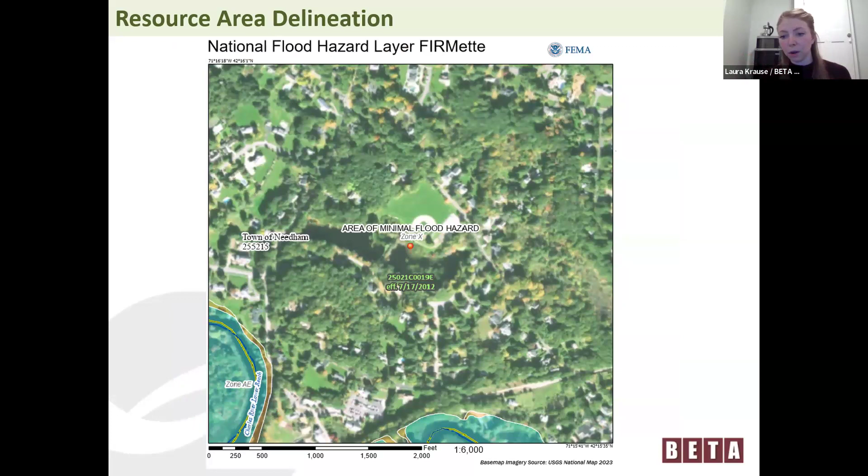And then on the north side towards the Walker Gordon Field, we do have some bordering vegetated wetland off of the bank there. So that was delineated in a couple of locations where there may have needed to be some physical work, but we actually don't have any wetland impacts, which I will get into. Also just want to point out that there is no floodplain mapped by FEMA on the site. So our resource areas that we're dealing with are BVW, land under water, and bank. And again, this is another image of a different time where you can still see extensive vegetative growth within the pond.

So a little bit about the outfall relocation. To get the project going in this location, we'll place the erosion controls at the limit of the outlet control, the existing structure. Regrade, pull back the structure, place a new head wall. Sorry, where's my cursor? New head wall in this location, and then we'll have this sediment trap and dissipator pad at the discharge point. That'll provide some additional attenuation of the flow that's coming from Walker Lane, and it will prevent additional scour at the bank. So this is a benefit to prevent some additional scour at the bank there.

This work will result in 10 linear feet of bank impact, and that's only temporary to provide enough room for the contractor to work there, grade out appropriately, and install their erosion controls. Once the project's done, they'll stabilize the area, native seed, and then remove the erosion controls once sufficient stabilization is achieved.

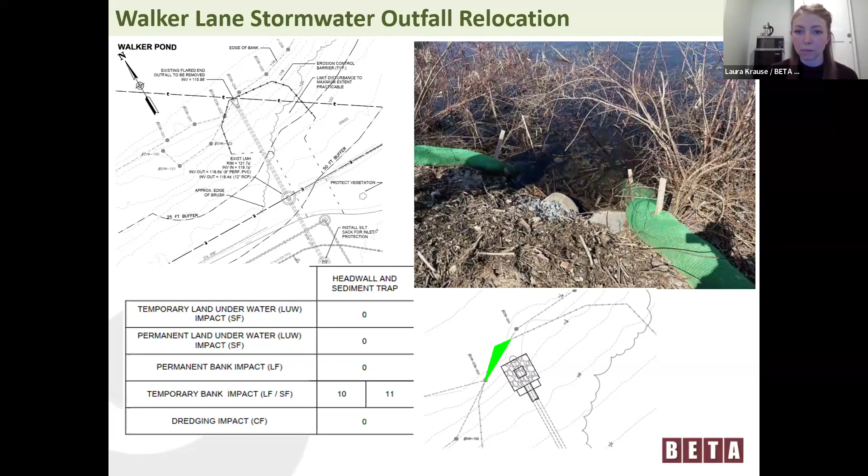The outlet control structure, this is a little bit more complicated here. This photo on the upper left is the existing outlet control structure. It's not in great shape right now, and that's why we're replacing it. You can see a board right here, and that's currently what's serving to regulate the water level right now. The proposed outlet control structure will be located essentially in the same location, and to construct it we'll also be providing a new drainage manhole in Central Ave here. And that will allow us, if we need to during construction, to bypass into the pipe beyond the limit of work. And it'll also provide this section of the outlet control structure as its own piece of the system, which will provide better maintenance over the long term.

You can see in the lower right-hand side here, those are our impact takeoffs. The new outlet control structure, because it's intended to handle the water here and is supposed to be in the same location, it's actually slightly into the pond. That's the only configuration that works for this particular structure. So it will result in 14 permanent square feet of land under water impacts and 11 linear feet of permanent bank impacts where the new structure will go.

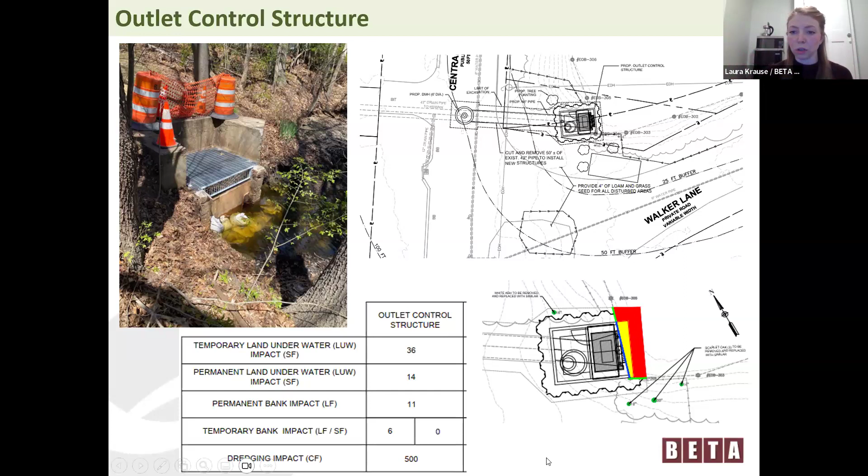And then outside of that, temporary impacts will result from installation of sheeting that will be placed around where the outlet control structure will be placed. That sheeting will also serve as the water control structure. They'll pump the water from there so that the work area can be dry, and then they'll install the new structure. At the end, they'll remove the temporary water control structure and restore the land underwater and bank in those locations.

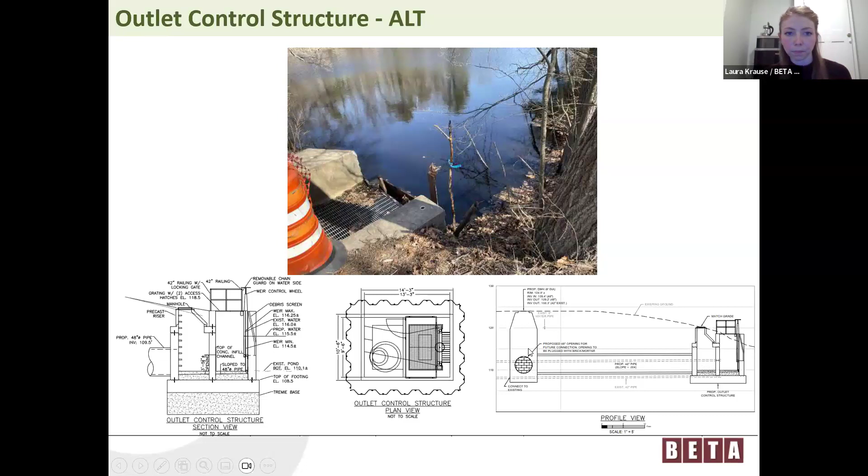It's another view of the outlet control structure looking into the pond, and a couple of additional views of the system here. So this is a profile. So this is the outlet control structure on the right side. Water will flow in. There's an access manhole on the back side of the outlet control structure, the new pipe, and into the new manhole. This is another picture of the impacts, but we've already discussed that.

So I will move on to another exciting portion of the project. So this was not part of the project as discussed back in December. So this is a little bit new. So these improvements, there's kind of three things happening here. The first is that we'll be collecting and treating stormwater from Charles River Street in a subsurface infiltration system under the existing parking lot. So this will provide some additional treatment from the roadway runoff, where right now it's running off the road through catch basins directly to an outfall. So now we're going to actually get some treatment there.

Also, we're proposing a perimeter trail along the north side of Walker Pond, along the down gradient limit of the fields. This trail is also going to serve as a perimeter infiltration trench, and it will have check dams every 100 feet to ensure that the water in the trench will actually infiltrate and won't just follow along the trail and make its way to a low point. So it'll actually infiltrate within the system there.

This is a really exciting aspect because nutrient loading to the pond from the field will be minimized because water will be treated through the infiltration trench, and then also, if it does end up overflowing, will be treated through the additional vegetation being proposed through the restoration of the buffer zone on the down gradient side of the trench. Those areas will be seeded with a native wildflower mix, and then areas that are currently maintained as lawn that are actually wetlands will be seeded with a wetland seed mix and restored to wetlands.

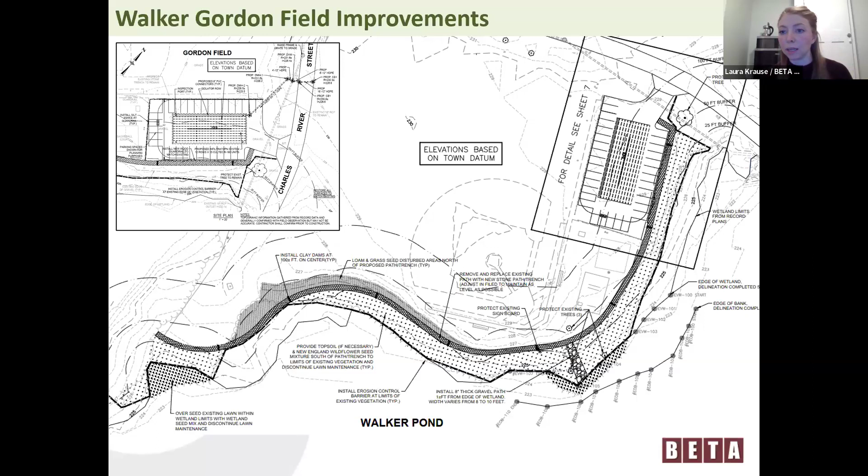So now I'll get into the pond management. I know that this was discussed in December, but right now, the first year, we're really looking to treat the aquatic nuisance vegetation, some hand pulling of invasive species management. We'll replace the outlet control structure this year, and then we'll install EutroSORB filters at the inlets to provide some additional phosphorus mitigation. Year 2, we'll be providing spot treatment with herbicides, and then we're going to be working on designing an aeration system at that point. And then year 3, continue to control weeds if necessary, install the aeration, and evaluate whether or not some additional sediment might need to be managed down the line.

And all of this will be carefully thought through every year with extensive water quality monitoring and vegetation monitoring to ensure that we know what's going on. We don't just want to be using herbicides all the time when it's not necessary. So included in the notice of intent was an alternatives analysis where we looked at several different types of chemical treatments, different ways to treat the pond with physical means, to address the water quality issue. And one thing that we did want to point out, as requested by the commission, was, well, what happens if we just do nothing here, right? What happens if we just let it kind of become a wetland?

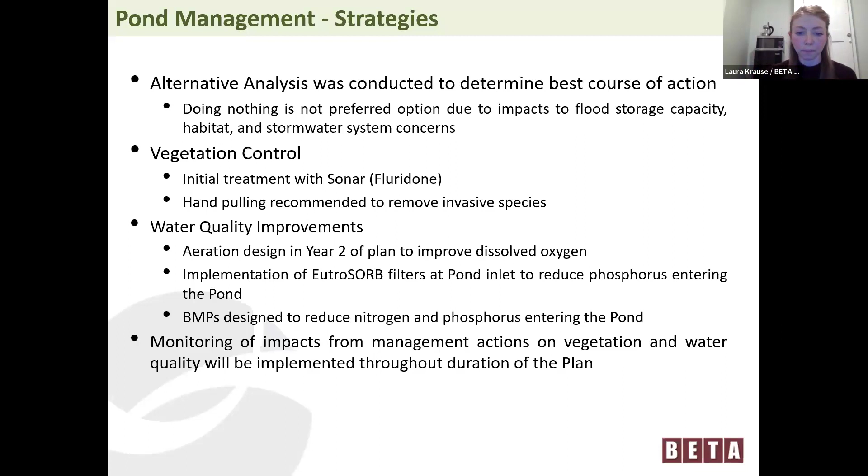And then lastly, there's a couple more things. The EutroSORB filters I already mentioned at the inlets to control phosphorus, and implementing the BMPs at Walker Gordon Field to reduce nitrogen and phosphorus to the pond as well. This was included in our pond management plan as an attachment to the notice of intent, but it's a general distribution of what has been observed out there to date. Extensive, as you can tell, vegetation throughout the pond.

And then from a mitigation and avoidance standpoint, the outlet control structure work, as I discussed, will be conducted behind sheeting, cofferdams. That will minimize turbidity increases in the water, which is something we want to prevent. We'll restore temporary land underwater and bank impacts with regrading and seeding on the banks, and then reestablishing a native substrate in the land underwater before we raise the water back up to its intended level. Portions of the buffer zone at Walker Gordon Field, as I discussed, will be restored with native seed mixes.

There are 4 trees being removed, 3 scarlet oaks and 1 white ash at the outlet control structure. And those can be replaced. We take the commission's suggestion on what species they'd like to see. And then invasive species removal, which I had already mentioned. So really exciting project. The next steps here are preparing the 404 pre-construction notification submission to Army Corps. That submission is required solely for the outlet control structure.

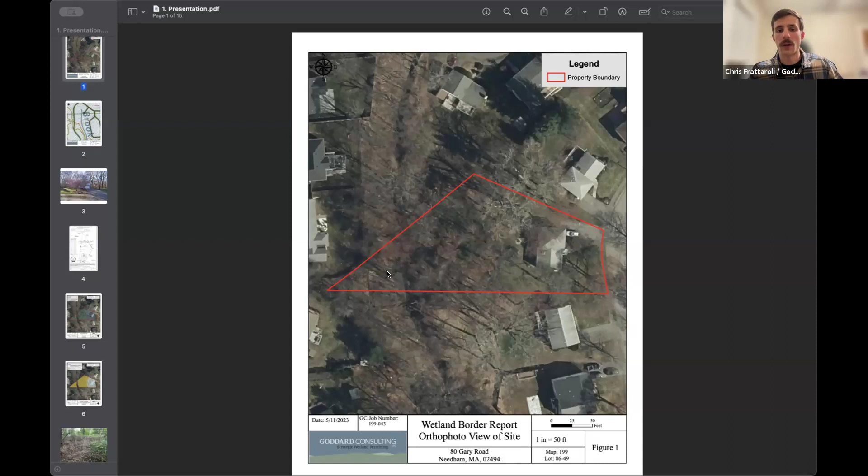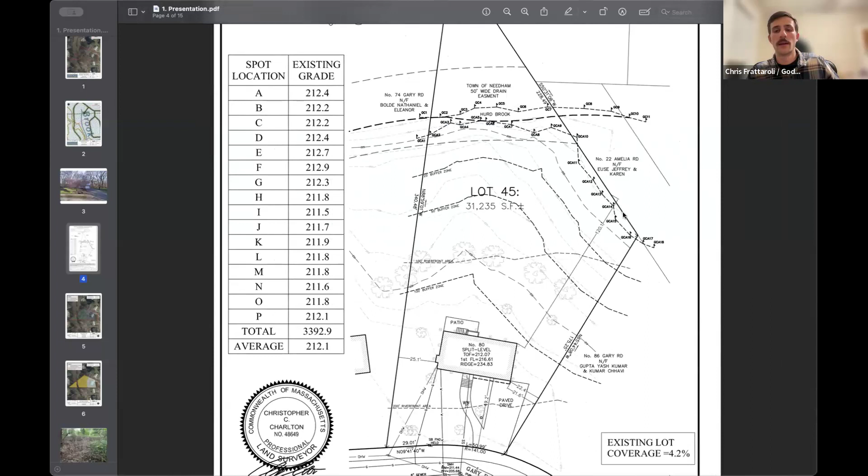The GC 1 through 11 series is going to be the mean annual high water line of that stream back there. And then the A series that extends in front of it is the bordering vegetated wetland line. So that is relatively narrow along this section of the stream, and then it kind of opens up over here. As far as the riverfront area on the site, you can see this green hatched area is that inner riparian zone, 0 to 100 feet. We have about 15,612 square feet in that inner riparian zone.

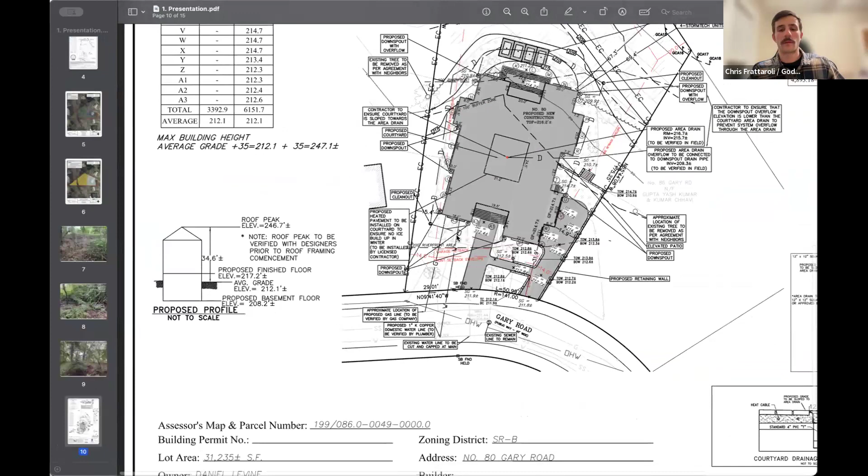Moving down to our proposed plot plan. Obviously, the house here is shaded in gray, walkway and driveway at the frontage. We'll see this smaller hatching in here, really tight around the house. This is our proposed lawn area. It's really just enough to be able to access around the house. We're trying to maximize the amount of habitat space that we're able to provide here.

So really the entire rest of the site, including up each property line a bit, is going to be managed for invasive species. This is primarily lawn over here, but this is all going to be converted to native habitat. This is all going to get seeded with a nice native herbaceous mix that's appropriate to the site, and then planted thoroughly with shrubs and trees.

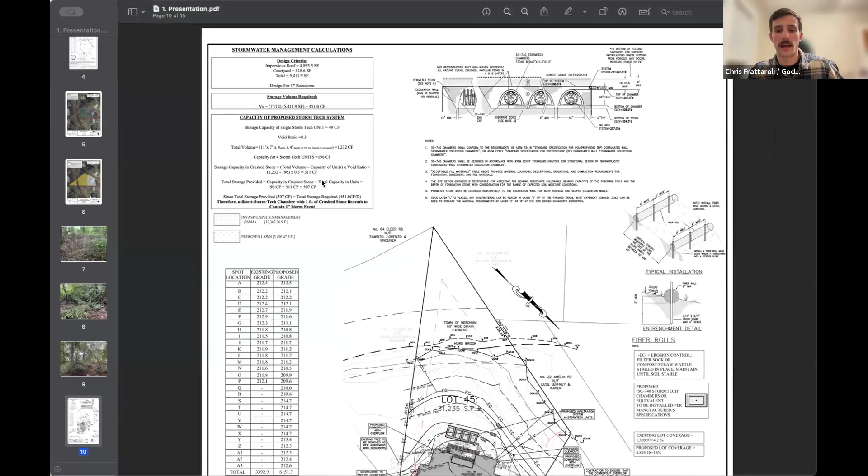You also see we do have a stormwater management system back here. It's 4 StormTech units. The revised plan does provide some calculations as to the capacity of that, and some more details of the system itself.

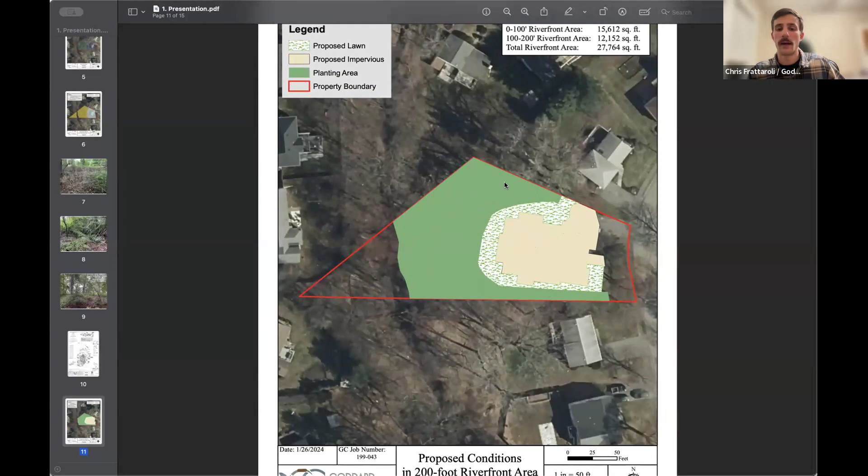Moving on down the line, this is essentially what we're looking at for a finished product, more or less, in really broad strokes. This beige area being the home itself, walkway, driveway, etc. Again, that really narrow lawn around the outside, just what's needed, nothing more. And then the green area is going to be what we are planting. The intent is to create a nice native habitat there with healthy vertical stratification between herbaceous, shrub and canopy layers.

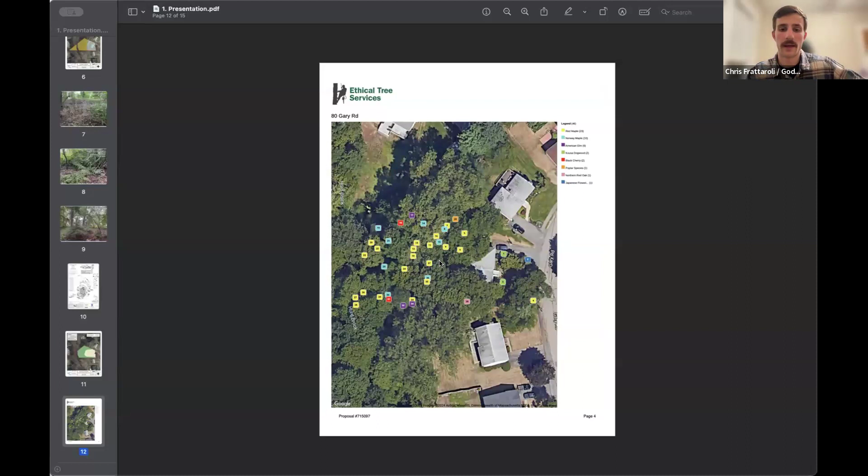As was requested, we did have an arborist go out and inventory the trees out there. So this is a little graphic of what he found. Then I took that graphic and overlaid it on the site plan just to make it a bit more cohesive. So these are essentially all the trees. I think we might have found one today that did not make its way into the inventory, but these are the trees on the site.

Yellow being red maple, that's the primary species here. We also have a decent bit of Norway maple mixed in, a couple of black cherries, a couple of elms, and a few others. So that is what we're looking at. As far as tree removal, we do have a decent bit of grading that needs to be done. So we are proposing to cut a lot of trees. There's no question about that.

We have a planting schedule. So what we've really done is we've beefed up that planting plan a lot. We've provided a substantial increase in the number of trees and shrubs. We're going to move down one more, and you'll see it has filled in nicely. These quantities of proposed plantings do comply with the town's policy on tree replacement. So for every tree that's going to be removed, we went through and did the math, and we're combining the tree and shrub replacements.

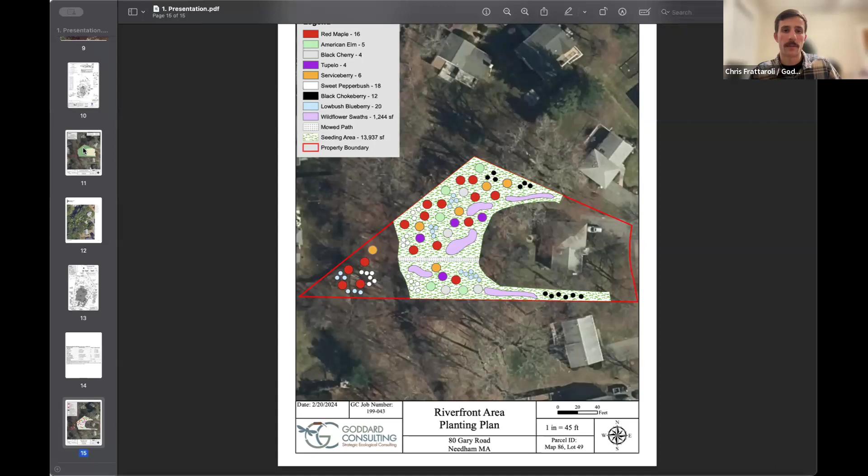Okay, great. Thank you. Let's go to the commissioners with any comments or questions. We'll start with Paulina.

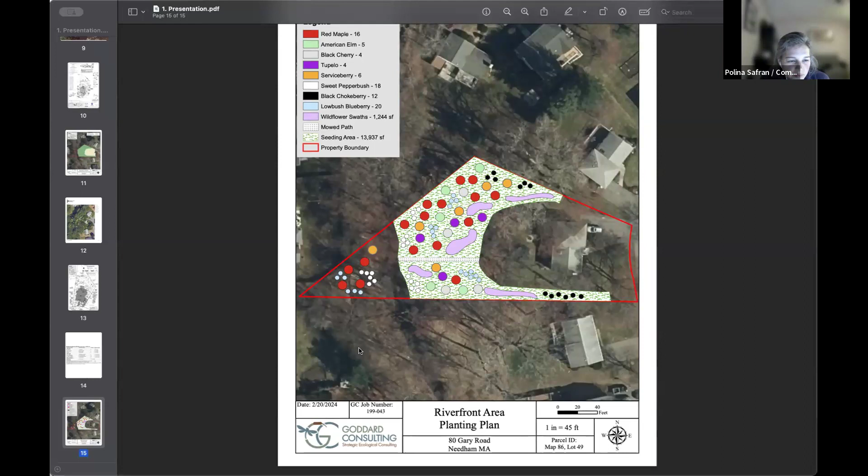Yes, I have a question. You showed us a plan. If you can go back to your page 13. Yep. And so there are a lot of trees that are labeled in the back, like 29, 26. I think they're all red maples. And you said you're not removing those. You're just removing number 21, which is a Norway maple. Is that correct? That within the 25-foot buffer zone, correct.

Yep. That 21 is the only one in the 25-foot buffer that's getting removed. Okay, so everything else is just a tree you identified, but it's not being removed. In that 25-foot buffer zone, yes. Maybe I didn't see the buffer zone. Sorry. Oh, yes, I see it right there.

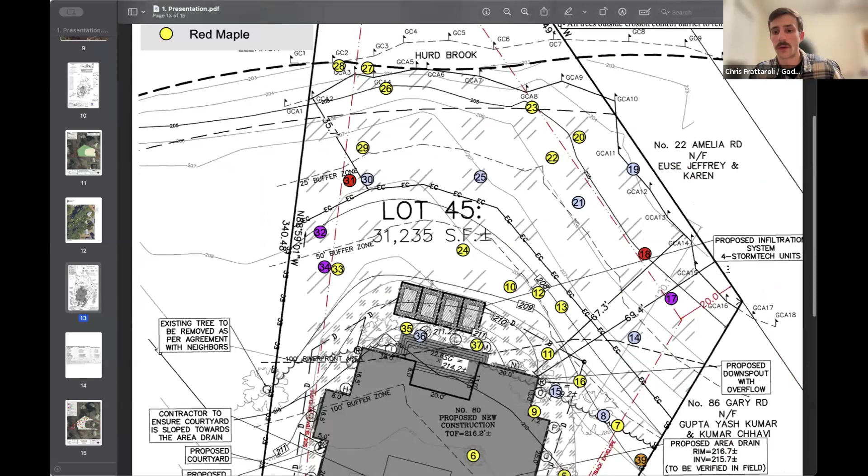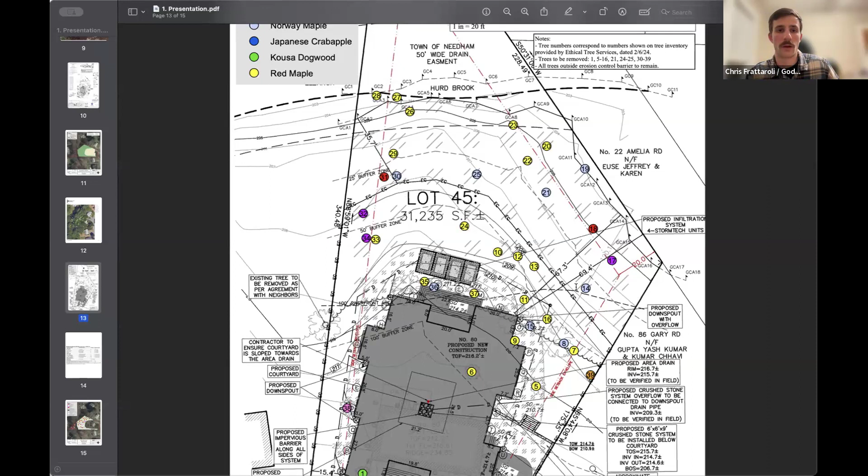Yep, along here. So really everything inside this erosion control line, that's all going to have to get removed for grading purposes, because we do have grade changes through here. And then these, let's see, 4 right along just outside that erosion control line are also proposed for removal. Obviously 3 being Norway maples.

I guess to me, it's why would they be removed if they're not going to be impacted by the grading? Yes, they're not native, but at the same time, it's a tree. I don't think you should just remove it just to remove it. Sure thing.

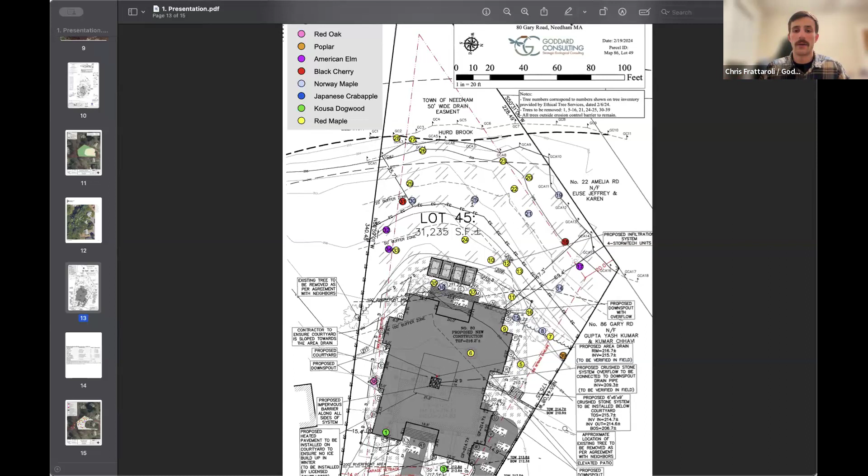Sorry. The idea here is really to kind of open it up and allow for, like I was saying earlier, that vertical stratification. There's really no shrub layer in this area, and the only herbaceous vegetation are some of those really aggressive invasives like the Pachysandra and English ivy. So our goal is really to open it up, allow more sunlight to penetrate, allow those herbaceous and shrub layers to really thrive and reestablish themselves. So that's the idea behind that. Okay, I don't have any other questions.

Okay, Allison? I didn't do the math, but are the trees that are being removed in the buffer zone, in the new planting plan, are there sufficient quantities to meet the requirement? Okay, that's one. And the second thing is, I apologize because I don't remember, is American elm really on our plant list? Clay, can you check?

I don't know if it's on your plant list specifically, but the reason that we included those was because there are a few elms in that area that will need to be removed for grading activities. So we thought it would be a nice nod to kind of replace those in kind. But if we do have concerns about Dutch elm disease, we can certainly revisit those as choices for plantings.

I mean, unless you're going to plant a disease-resistant American elm, which you didn't say you were, I would agree, I don't think it's a good idea. The disease is not gone. It's not as bad as planting an American chestnut, but it's not far off. I love them. They're my favorite tree. But there are some disease-resistant American elm varieties. I would look into that. Don't just get an American elm, you have to get one that's really been tested.

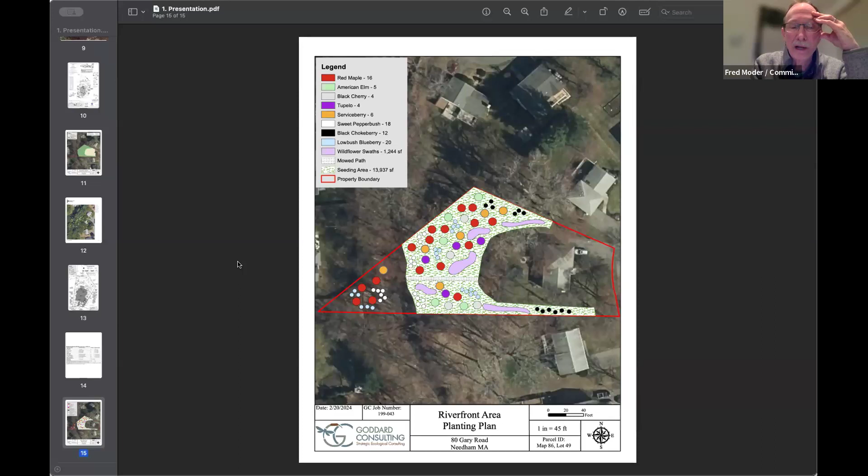That's one. And then the other thing is that when we were out there, we saw that there was a couple of very, very mature grand cottonwoods that I'm not sure are on your inventory, and I'd like to clarify what the plan is about those trees. Yeah, absolutely. So to your first point, I remember this was fresh in my mind because I was working on it recently. The provision is that up to half of the trees to be replaced may be replaced at a 4-to-1 ratio with shrubs. So that's what we've gone ahead and done. We think it's, again, going to provide that nice mix between that canopy and shrub layer.

And then as far as those cottonwoods, this number 39 right here is essentially right on the property line. That one is proposed to be cut. The other one that you saw is well off site over here. And what's the need to cut that? I mean, I don't know if you have a figure on the diameter of that tree or its possible age. I do believe those were included in the tree inventory. Let me see if I can pull it up really quickly.

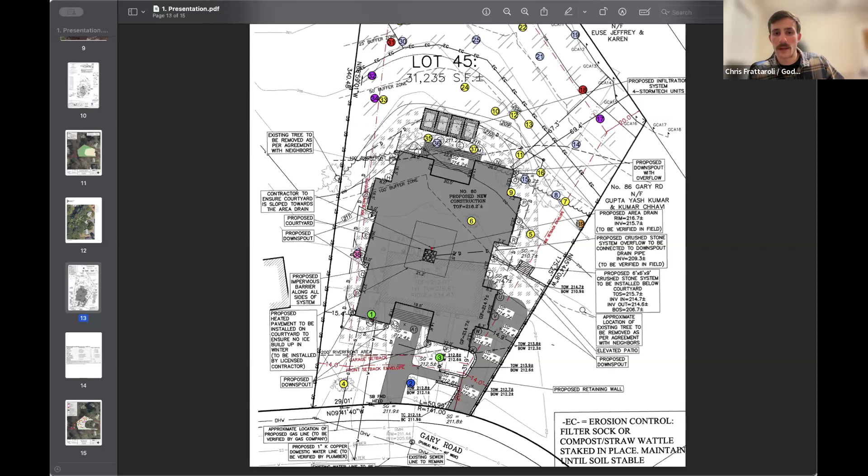That tree was listed as a 37 to 42 inch DBH. So another stipulation of that tree replacement policy is that trees over, I think, 32 inches should be replaced at a 3-to-1 ratio. So that's been included in that as well. I think the major concern is that because of its size, it is going to be overhanging or at least very near to the proposed building here. So that's really the idea with that one. But the second one that you saw is offsite and is more over here, obviously not a part of our plans. So the tree couldn't be pruned instead of removed? It's possible. That's certainly something we can look into.

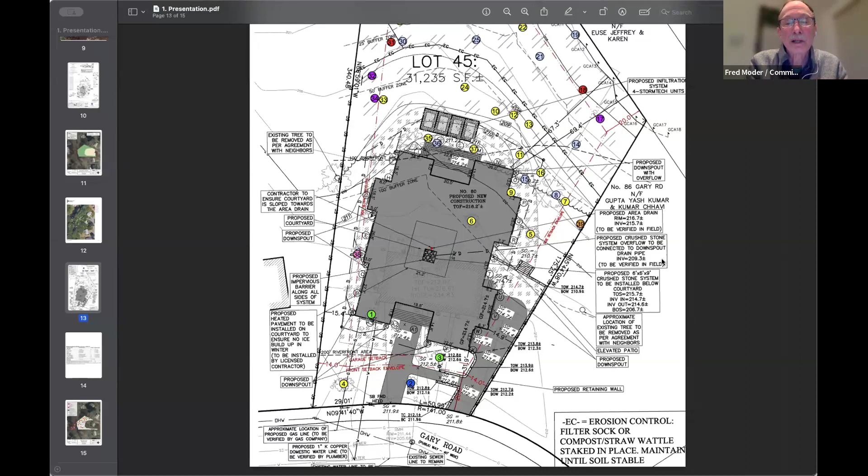It was a visually stunning tree, and from what I know, it has pretty good habitat value. One thing I'm thinking about is that there's really a nice effort to remove invasives and to restore a lot of native trees. However, from a habitat standpoint, I believe it's really nice if you have some mature trees along with some younger ones. You're going to open up a lot of sunlight, but then all these trees are going to grow up and mature. You're going to have shade again. And if you can preserve as many of the mature trees while you're introducing the young ones, it just seems like that's going to have a real benefit to the area.

Sure, that's absolutely something we can explore. Maybe we meet in the middle there and hold on to a few more of the mature trees and kind of scale back in that regard.

Anything else, Fred? Nope. All right, Reed? Yeah. Chris, thanks for meeting us at the site today. That was very helpful. Absolutely.

And yeah, I'd just like to echo Fred's point about the cottonwood. It's a very impressive tree in good health. So I think anything that can be done to save that tree would be appreciated. I appreciate what you're proposing to do also in terms of creating a native habitat back behind the house in that riverfront area. And I think a lot of what you're proposing to do is great with invasive species removal and the native plantings.

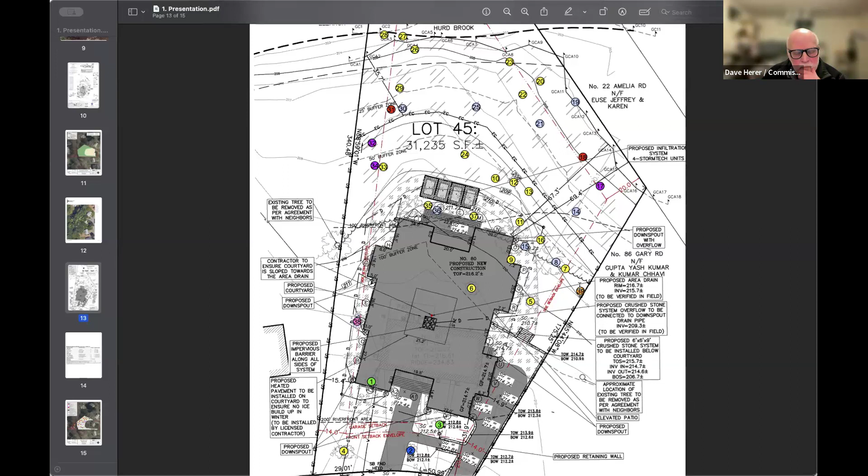Now, my only other comments are with regard to the stormwater system. You provided basically infiltration capacity for the roof of this building and the courtyard, and the total impervious area is over 4,000 square feet. And so if you read the stormwater bylaw, it stipulates a minimum of 1 inch over all the impervious areas. So from that point of view, this infiltration area is slightly undersized. And it's unclear where the runoff from the other impervious areas would go, which would be the driveways. So that's something I think you should look at.

Also, there's no discussion of the soil characteristics where the infiltration basin is going to go. And generally people provide some analysis, through a test pit or at a minimum a paper analysis. And we sometimes would defer a test pit to a later time, but it's typically a condition that we try to look at just to verify where the groundwater is with respect to these infiltration chambers, and also the soil capacity.

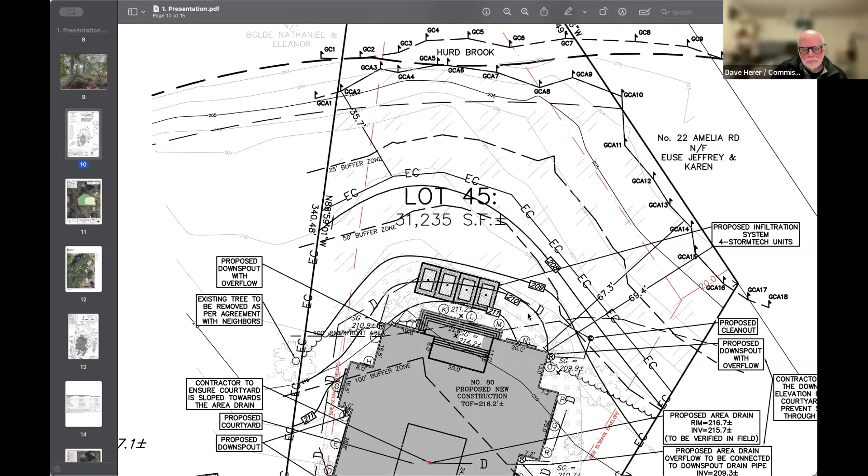Sure thing. I have to admit the stormwater design is a little out of my area of expertise. I usually defer to the engineers on that topic. But this is all really great feedback, and I'll get in touch with them and see how many of these things we can button up for you. Great. All right, that's all my questions.

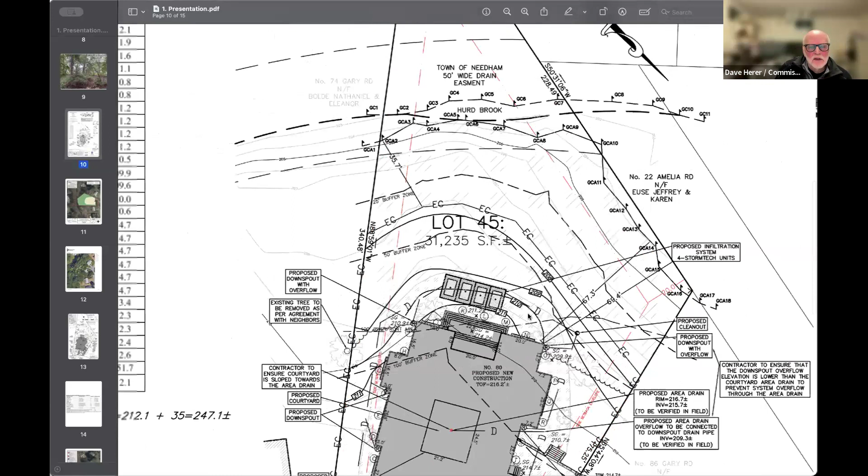I would go to Clay and Deb to see if they have any questions. I'd be interested in Clay's point of view about compliance with the riverfront restoration requirements. Yeah, so I was just rechecking my numbers now. Under what we usually see, compliance with, I think it's 10.58(5) redevelopment under 5F, usually the 2-to-1 mitigation that a lot of standard projects follow. As I said, it's a pretty quantifiable square footage.

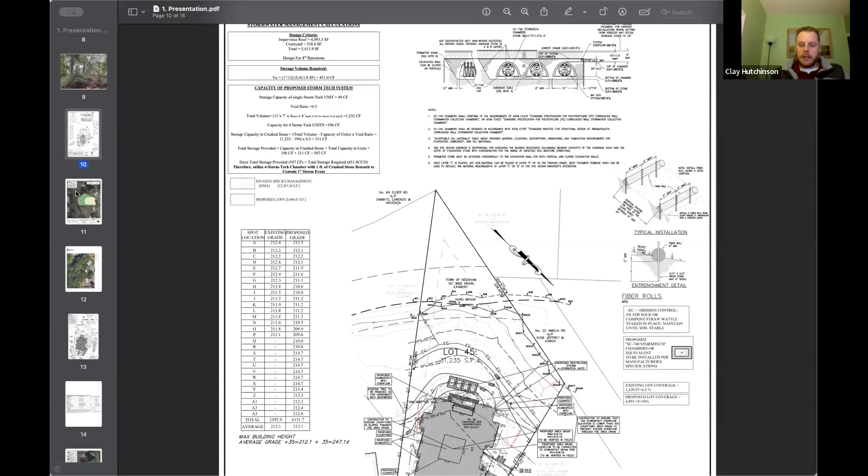I was pulling the numbers that Chris provided for the existing degraded versus the proposed degraded areas, as well as the previously altered areas. The numbers Chris provided also included areas of invasive species, but even removing that, just under that standard 2-to-1, the reduction in lawn minus the new house footprint does provide a certain amount of square footage, and the current degraded area on the lot is below 10%.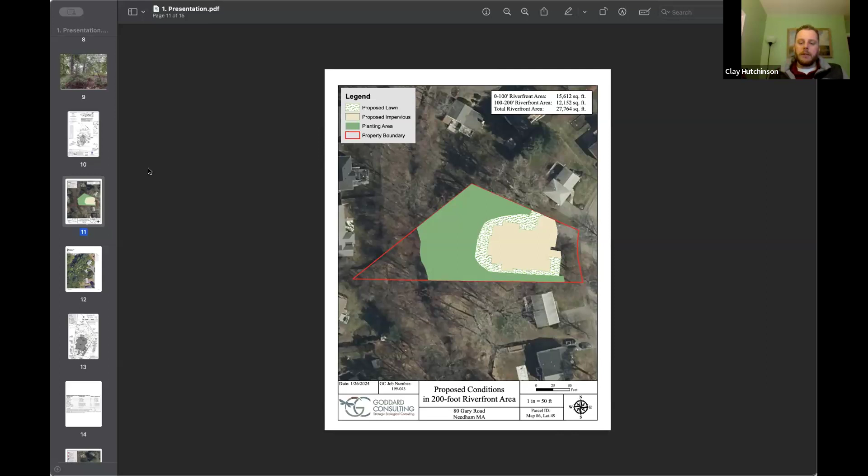So when you remove the additional square footage up to 10%, because that's generally allowable before the mitigation kicks in, and then you look at the conversion of lawn to renaturalized areas with the native plantings, the mitigation would be about 6,000 square feet total, give or take 150 square feet, that would otherwise be required for additional 2-to-1 mitigation. According to their planting plan, the whole shaded restoration area is a total of 13,000 square feet.

As you've noted, there are mature trees, a lot of invasive species cover, and some native plantings in there. So it leaves it open for you to determine this. The lawn being given up on the sides of the house certainly contributes, but the outstanding amount of 2-to-1 mitigation is about 6,000 square feet. If you feel that this 13,000 or almost 14,000 square feet of renaturalization satisfies an additional 6,000 square feet of lawn conversion, it appears to me to be complying with the riverfront area. That is up to you.

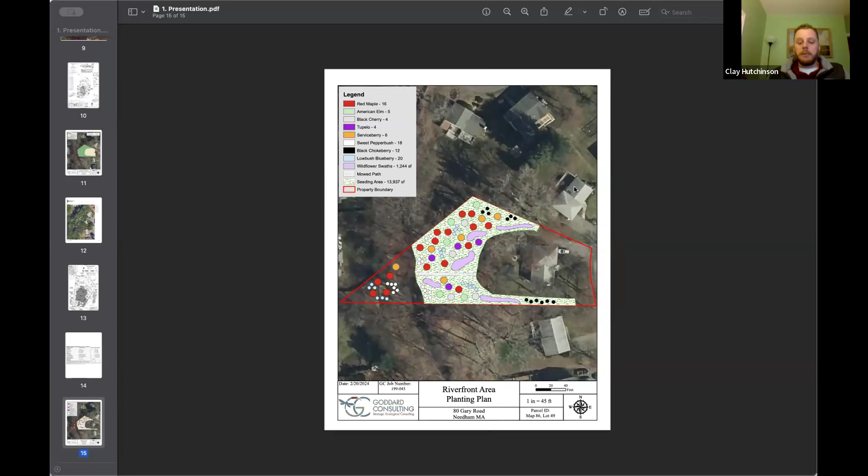It could be that you wanted to see more square footage, but I pulled the regs, and there are provisions under section G for the commission to attempt to quantify these changes. So in my opinion, this can be interpreted as complying with the riverfront area, provided they have the mitigation and ongoing monitoring for both survivability and management of invasive species long term. And as mentioned earlier, some kind of barrier along with our plaques signifying this area is protected in perpetuity would be an ongoing condition in the order of conditions. I think that it would comply.

All right, great. I don't think there's much room to expand the mitigation. I think they've maxed it out anyway. So Deb, do you have any questions or thoughts, comments? No, this was kind of Clay's review, so I'll go with Clay's opinion on it.

Yeah, I think with long-term protection and mitigation, there was a lot of clear evidence, as the commissioners saw at the site walk today, of extensive invasive and generally non-native species back there. The bittersweet is definitely taking over. Long-term it'll be a bit of a struggle to keep invasives from re-encroaching from neighboring properties, but that's an ongoing statewide problem. It's not unique to this site.

While this is an ambitious plan, if it's monitored for a minimum of 3 to 5 years, and the homeowner is made aware of what to look for to prevent the new plantings from being taken over by something like bittersweet, it could really be a net benefit mitigation area. Yeah, it could set the standard for this area.

That's the goal. All right, so is there anybody in the audience, any members of the public that want to comment? I don't see any raised hands. Okay, so sounds like there's a few loose ends to be tied up, so we could continue this till our next meeting and hopefully wrap it up then. Does that sound okay? Excellent.

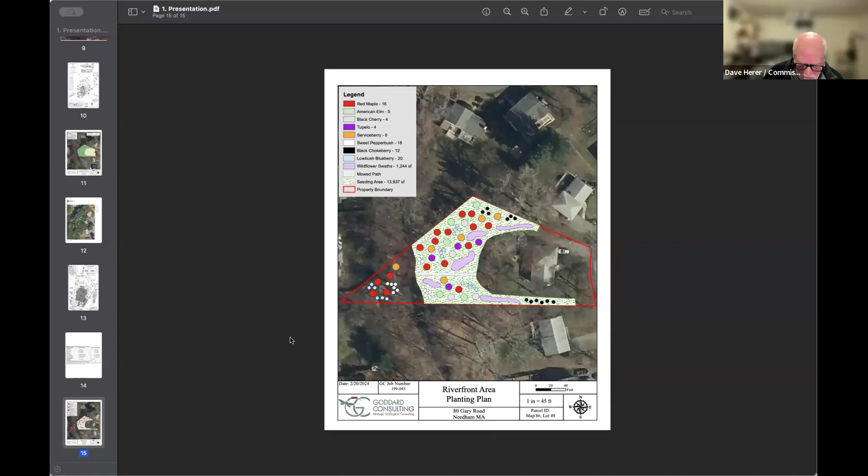Reed, aye. Fred, aye. Allison, aye. Paulina, aye. And chair votes aye. Okay, thanks a lot, and we'll see you in a couple of weeks. Sounds good. Thank you, folks. Thanks.

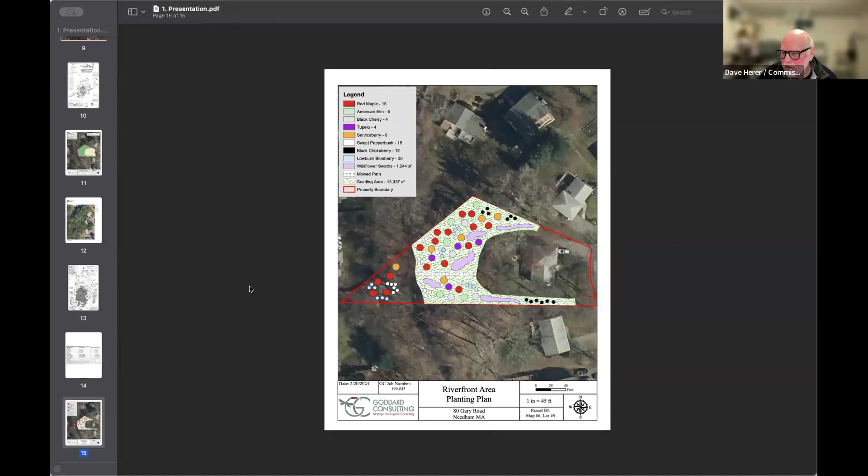All right, now is Fernando still here? Yeah, can you hear me now? Oh, yeah, sorry about that, for making you wait. So I guess the floor is yours, or Deb, you want to give us some background? Sure. So once again, this property is 40 Lake. Clay, maybe you can put up the plan that I emailed you.

So I was first approached about this property back in June last year, actually by a neighbor. So essentially the plan was to take the existing house down to its foundation, and there wasn't going to be any ground disturbance or excavation or anything that would trigger them to come before conservation for a permit. Field Resources did work on this existing conditions plan back in June last year. And the owner hired Rich Kirby from LEC Environmental to conduct the delineation.

So you can see that it's a very steep drop off at the rear of the property, and the bordering vegetated wetlands are located pretty close to the bottom of that slope. So there have been some issues as far as the building department and their regulations. So also back in June, there was a stop work order through the building department. And that's around the same time that I was contacted by a neighbor that was concerned that they were doing work without a permit.

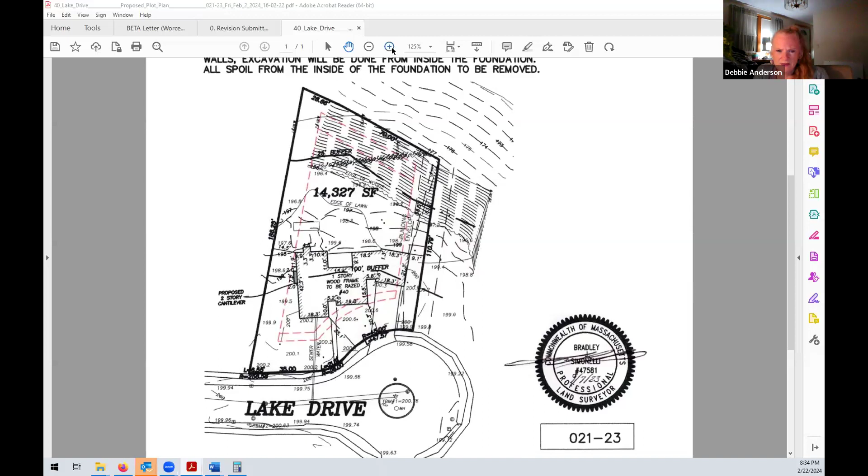So if you can see, it's hard to tell, but the 100-foot buffer runs not quite through the middle of the existing house on this plan, but essentially a portion of the existing house was within the buffer. So I went out today. The building supervisor had stopped construction maybe a week and a half or 2 weeks ago, I'm not sure, Fernando can correct me on that, for various issues. So when we came today, they were doing work on the property, even though there was a stop order.

So they spoke with the building superintendent, and they have several steps to go through to come in compliance with their regulations. So at the time I walked around the property, there was an erosion control that had been installed. But there were obvious signs that there had been work done. Clay, if you can maybe put up some of the pictures. Can I ask a quick question? Yeah, sure. Can you go back to the site plan? Sorry. Sure. Go ahead, Clay.

So the original project was to take down the house to the foundation and then what? And then reconstruct the house in the same footprint. And it's partially within the 100-foot buffer zone. Correct. Why wasn't a notice of intent or an RDA submitted? Because it wasn't going to trigger it, because there wasn't going to be any ground disturbance.

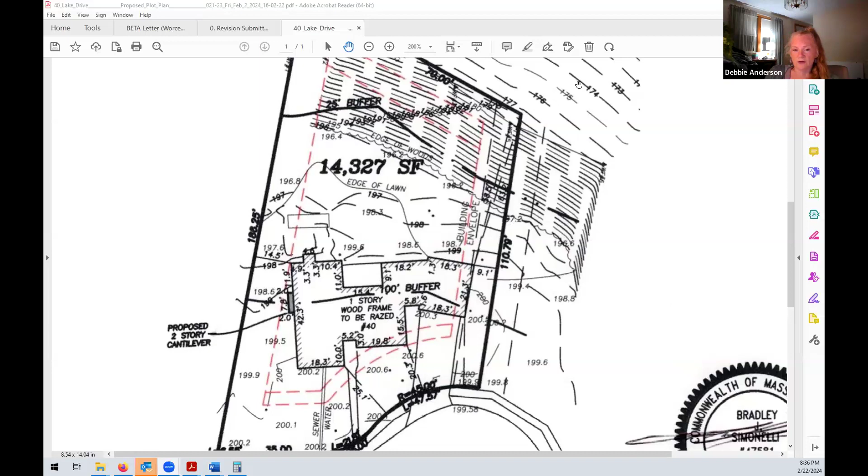Okay, but forgive my ignorance, if there's no ground disturbance in a buffer zone, then it doesn't trigger the Wetlands Act? Correct. Okay. So Clay, if you put some pictures up now, that would be great. So the good news is there is erosion control in, so the site is stable. I don't know how much grading was done. Can I pitch in now? Well, let's see the pictures first.